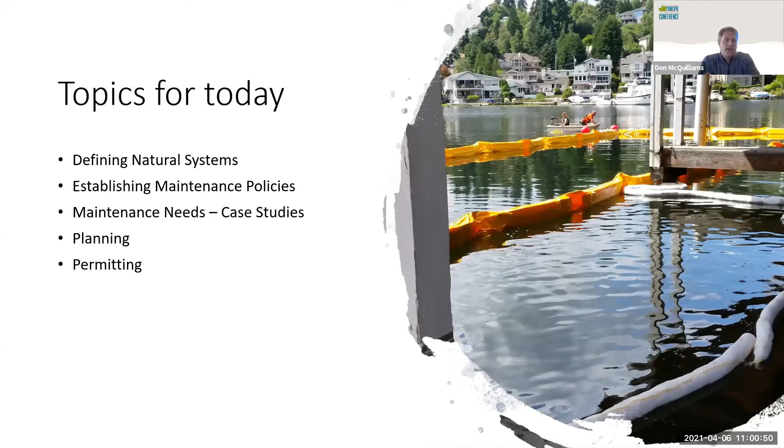So what I'm going to talk to you about today is defining our natural systems, establishing some maintenance policies and practices. I'm going to go through some case studies of why we do what we do, and then talk to you a little bit about how we do our planning and permitting related to natural systems.

So first off, let's make sure we're talking about the same thing. So we define natural systems for the purpose of this conversation as waters of the state. So these are streams, rivers, lakes, and tributary open channels. These are not ditches, pipes associated with your MS4. Those are under the restrictions of the NPDES permit, so they may or may not apply to what we're talking about today. So let's just keep this focused on the waters of the state.

You may also have some open spaces in your system where you own some property, forested land, wetland, etc., whether that be in your utility, your public works department, or just owned in general by the city.

So why am I talking about natural systems today? In Bellevue, we define our storm and surface water system, and we also refer to it as our drainage system, as the entire system within the city, both public and private, naturally existing and man-made, for the drainage, conveyance, detention, treatment, or storage of the storm and surface waters. So that right there pulls in my natural systems to be part of my storm and surface water system as I manage it across the city.

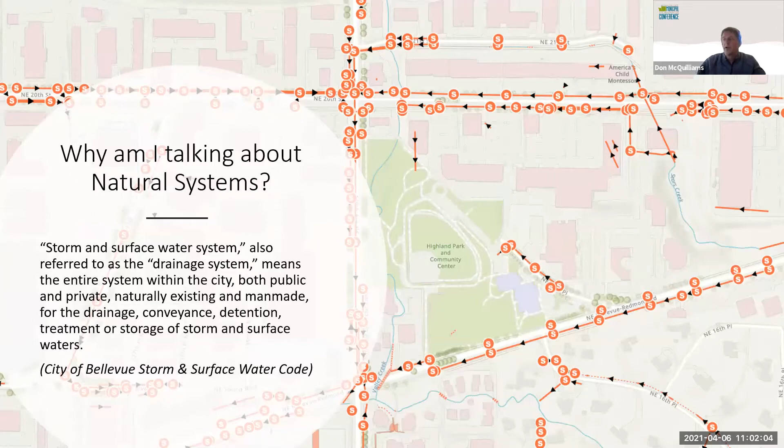To go on a little further, my storm and surface water system plan has a mission statement in it that says I have a surface water system that controls damage from storms, protects the surface water quality, supports fish and wildlife habitat, and protects the environment.

Why do I mention this to you? Because these two policies give me the authority to go work in natural systems. I don't have to go back and get that authority from my management, from my city managers. When I have an emergency, it's already written into my code, so it allows me to do that. So I want you to look at your organization's policies and mission statements, and do your policies and mission statements give you that authority up front? If not, you may want to think about going and talking to folks about establishing that inside of your policy.

Also look at your city comprehensive plan. I know in ours, there's a lot of ties to the environment, to natural systems, and how that works. And then are there any other policies that you need to consider as you look at your natural systems?

Okay, once you've established your policies and procedures a little bit, now you got to figure out who's going to do the work and when. So we have this very simple little grid that we give to all of our staff, so they have a good understanding of how and why we do work.

So you got to consider who owns the property. Do you have any easements or other agreements on those properties? What are the impacts threatening your public infrastructure that would have you go in and do some work in a natural system? And is it an emergency? Are there homes and businesses that are going to flood as a result?

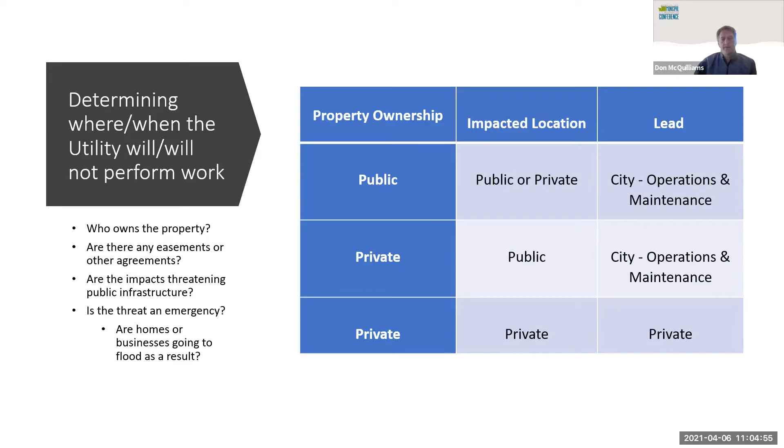Now, if it's a private to private matter where we have a beaver dam that's going to overtop a bank and flood an associated business, that is not something the City of Bellevue will step in and do work on unless it's an active emergency. Goes back to that on the left, very bottom: is somebody going to flood? And when I mean flooding, I mean water inside of the living areas, not nuisance flooding where it's in their parking lot.

Okay, let's look at a few types of maintenance and why we do maintenance on some of these open space or natural system areas. I'm going to talk to you about some case examples of brush clearing, sediment removal, beaver dam maintenance, flood protection, permit required maintenance, and emergency response.

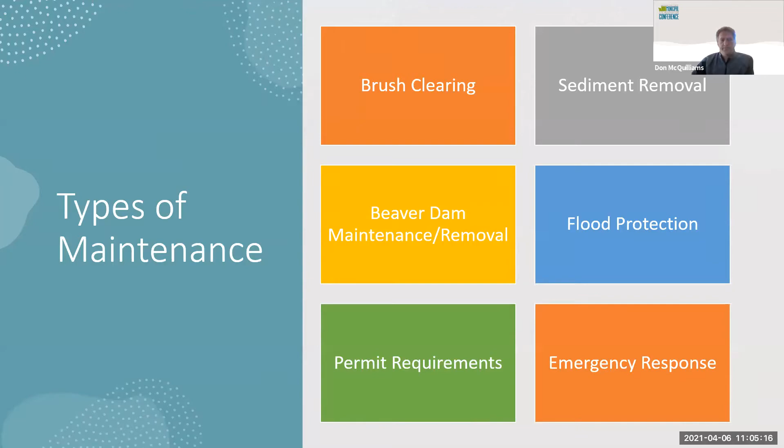So, brush clearing: in this example, in the 1980s, our engineering team had a wonderful idea to build a flood control water quality project just downstream of Phantom Lake and construct a new stream channel that would carry the water through the parkland there quicker and more efficiently than the previous wetland that used to exist. The two pictures you're seeing are actually that stream channel, and we go in every year and cut this brush out of the stream channel and haul it off site so that stream channel can function as designed. The design is down in the bottom right. Why do we do this? Because we've built this project, and as part of it, maintenance standards were set, and we've been doing those since the 80s. Utilities now owns this project going into the future.

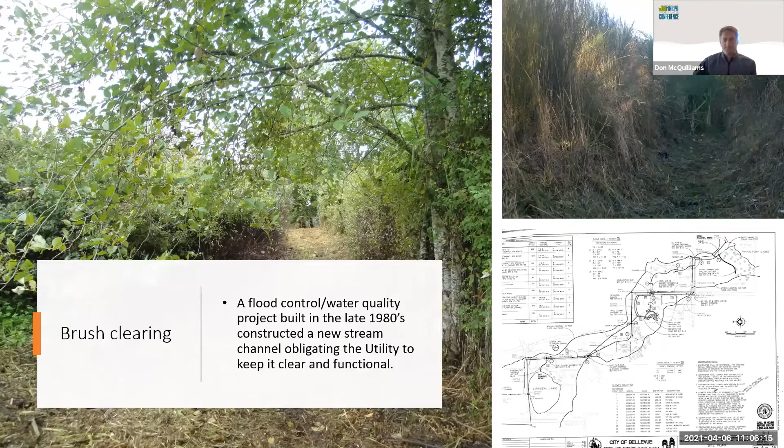Bellevue has about a half dozen what we call sediment removal ponds. These are in-stream or off-stream facilities specifically designed to capture sediment from the streams during storm events, drop that sediment out, and then we have a means to reroute those streams around so we can excavate that sediment. Why do we have these? Most of these are a result of land use practices, legal settlements, easement agreements. They all have some legal component to them. So what's involved in a project like this?

Well, they can get very big very fast. This picture you're seeing here, we call it Anna's Pond, and this one has a stream bypass that we have to put in place. We have to dewater the entire pond. Once the stream bypass is in place, we have to remove all of the fish without killing any of them, move them upstream or downstream, and account for all of them before we can even think about putting our excavators in there.

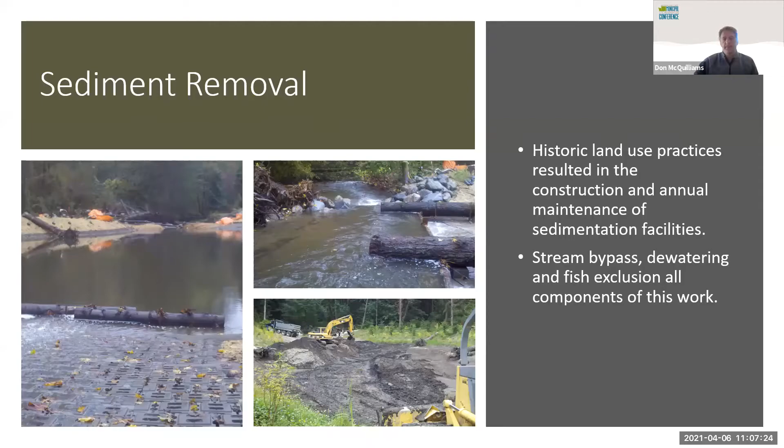All right, everybody's favorite: beaver dam maintenance. So it seems like over the last 10 years, I want to say around 2010, the beaver population really started to explode in the urban environment, and it's been going like crazy ever since. That picture in the upper left was one I ran into one day who was out sunbathing when I was out wandering around the site. I think he was just there to taunt me. That picture on the upper right, I'm going to talk to you about a little more on the next slide.

That's a picture of a dam that we do regular maintenance on. And then this tree picture down the bottom left that's cut—I showed up on a Friday, and that's about a 12 to 14 inch cottonwood. On Friday, there was no marks on that tree whatsoever. I came back Monday, and that tree had been completely cut down and was laying over the top of this dam because we did maintenance on it that Friday. Apparently the beaver did not like that, so he dropped it right on top of his dam.

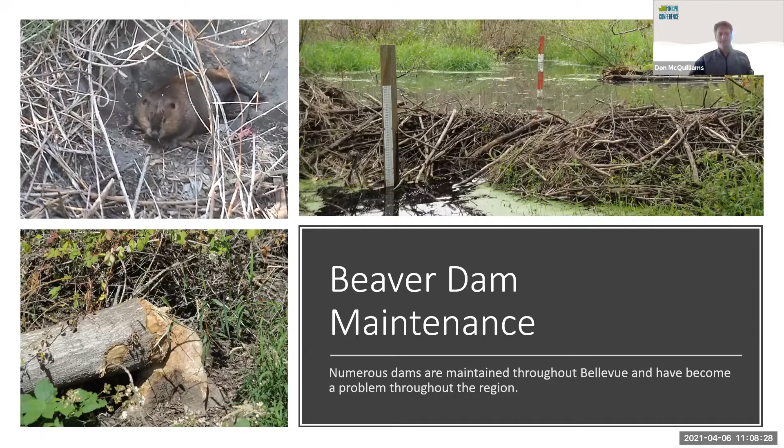So in that case, if that dam were to break, it's going to go inside that culvert and we're never going to be able to get it out. So this is a full removal case. This is where we go in, talk to our permit agencies, and coordinate to remove that entire dam in one sitting in 6-inch lifts.

This one, ironically, we removed the entire dam. They came back and built a new one inside the culvert, which we had to remove again. We also used trapping at that point to relocate many of the beavers to a different site. I'll talk to you a little more about trapping when we get farther along.

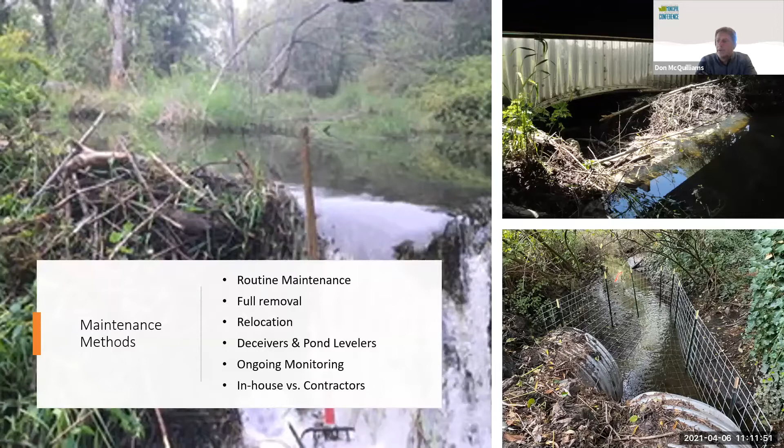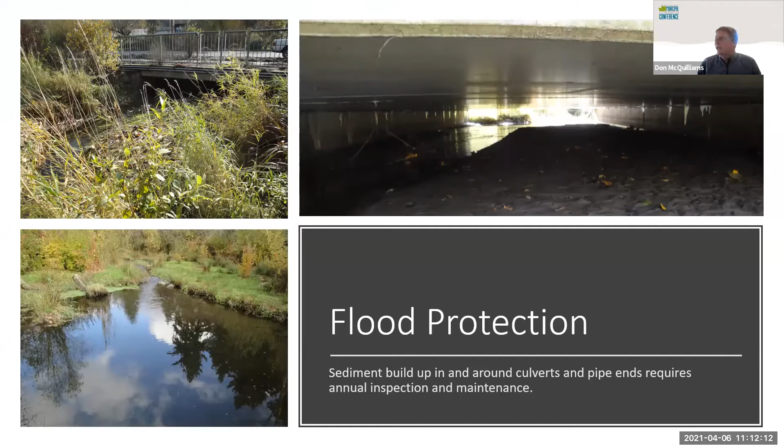All right, we also do flood protection in Bellevue. So this is a culvert underneath one of our roadways. It builds a lot of sediment up under that culvert. We can't let it build up all the way to the top, so we have to remove that. We go in here every few years, crawl on our hands and knees, and put a Vactor hose down there to remove that sediment.

Permit required maintenance. If you build a lot of in-stream engineering projects, they come with permit requirements. This one was a project to control sedimentation from getting into the gravel beds downstream that were built to help the salmon. So we had to come in on this one every couple of years and remove sediment from a sediment trap inside of this vault. As you can see, it's pretty labor intensive to get in there and get that done.

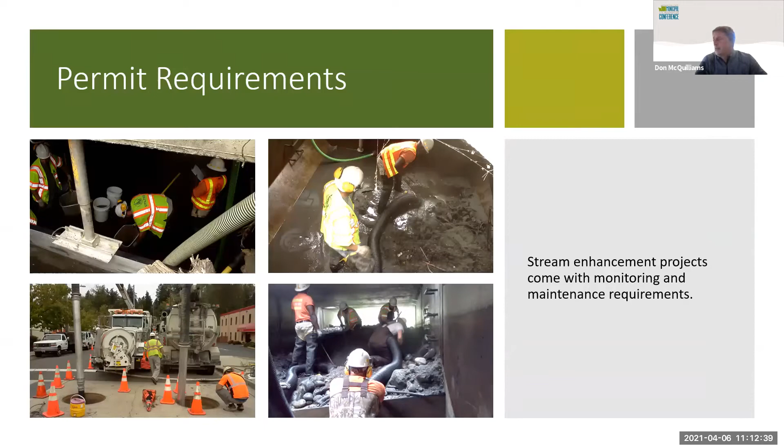Then there's emergencies. The 3 pictures on the left are a landslide that filled our detention pond. That bottom picture on the left, that's one of our guys in there. He created an air wand where he put a long piece of tubing on the end of an air compressed hose, pinched the end of it, and put a valve on it so he could shoot compressed air down into the sediment and the muck to try to find that outlet structure to free it up. Top right is a culvert that failed on us, got bent over, so we had to take an emergency HPA to go in and fix that.

And then the bottom right is a flooding problem. It's the same channel, both pictures, but that grass was clogging that channel to the point where we had upstream flooding and had to take an emergency action to go fix that.

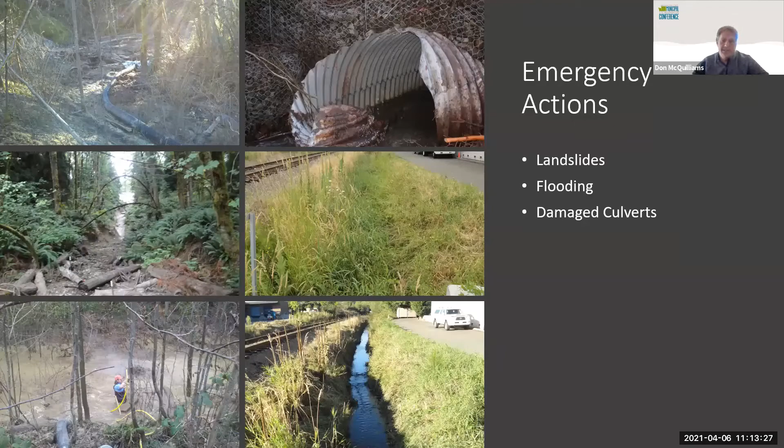Okay, so I just showed you some examples. That's what you might expect if you're working in the urban environment, if you're working in natural systems. So how do you do all this? Planning is your friend. Get it all written down up front. Take the time to write down all your sites around your city, what you do, why you do it, define the problem. This is going to be used to help you manage your system.

It's also going to be used to help you sell your management of your system to your permit agencies. What you want to include is where everything is, how you're going to inspect those, when an inspection triggers maintenance, how you're going to do your work methods when you do have maintenance—how you're going to remove sediment from that site, for instance. How you're going to sequence your construction, meaning how your trucks will come and go and how your excavator will move around these sites. Include any diagrams and designs that you have.

Some of these sites might be pre-constructed and the engineers may have already thought of this. For some of our larger sedimentation facilities, we have built-in bypasses. So the engineers did think about how to dewater those sites ahead of building them.

Think about what you're going to do with the sediment that you pull out of these sites. Do you need to test it? Is there contaminants in that sediment that needs to go somewhere else?

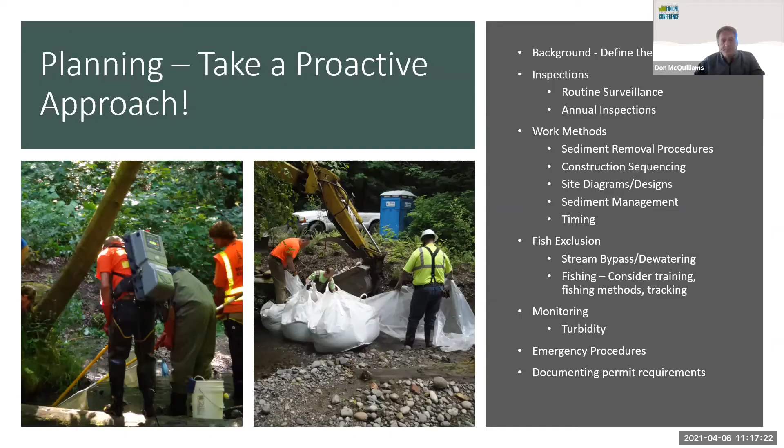So speaking of permitting for this work, why are you doing this permitting? The first thing you need to understand: you're doing it for the health of the streams, you're doing it because you're a good environmental steward, and you're doing it because it's the law.

There are a lot of permit types when you're working in streams and lakes. Your main one is this hydraulic project approval from the Fish and Wildlife Department. And that plan you put together in the last slide, you're going to use as your project plan to permit this work with Fish and Wildlife.

We're talking year-round project work here, not just project by project site. I like to try to permit multiple sites in one permit if I can. It's not always possible, but working with your agencies, often it is.

Other permits you may run into are clear and grade permits issued by your local municipality or county, land use permits—especially if you're working around sensitive or critical areas—shoreline permits if you're on the shores of lakes, or you may find yourself getting an Army Corps permit. I have one project in Meydenbauer Bay of Lake Washington that requires an Army Corps permit because it's within navigable waters.

I can't stress enough how much building relationships with your permit agencies helps. So if you don't know your permit agencies right now and you don't know who those people are, go look them up, go introduce yourself, go learn their names.

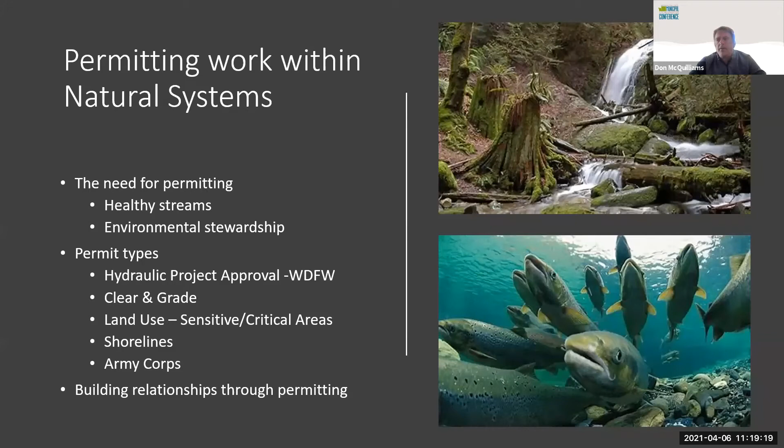I would be in trouble with my staff if I didn't mention aquatic invasives. In Bellevue, we have New Zealand mud snails - that's a picture of them on the bottom left over that coin. Horrible little things. The fish eat them, thinking they're filling up on food, but they're not. These little snails don't break down inside the fish, and the thought is eventually the fish will starve to death from eating them. They multiply like crazy, and they're very, very hard to get rid of once we have them in our streams.

That map on the right, that's a bunch of sites around town that we keep track of. When we find new snails, the red and purple mean it's a site we've identified that have mud snails. The orange and yellow are sites that potentially have them, but we haven't actually found them. The green is where we don't believe they are at this point.

But you need to talk to your staff about this. If you're going to be working in streams, this is important because we don't want to be moving invasives around - it's against the law. The best way to prevent that is just to stay out of the streams. So if you can minimize the amount of work you do in streams, great. If you can't, if you have to go in the streams, there's some other ways you can do it.

If you're only going in once in a while, the boots and gear you take into the streams, you can clean up real good, set off to the side, and let it dry for 2 weeks to a month, and then it's probably fine. If you're going in and out of streams more often, you need to decontaminate that gear.

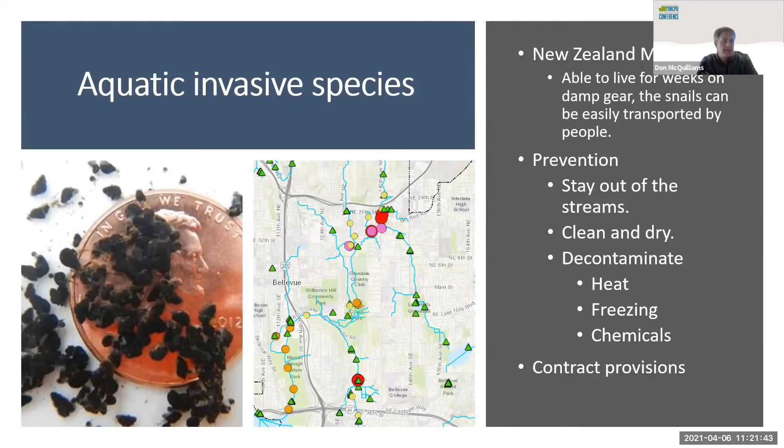And then in any contracts you have with contractors going out to work in your streams, please make sure you have provisions in there that speak about aquatic invasives and what they need to do to make sure they're decontaminating and following the appropriate procedures. And with that, I am happy to take some questions.

Thank you, Don. That was a very interesting presentation for sure. We do have some questions popping up, and I have some as well. Still getting my head around that - that was an outside-of-the-box presentation, so I appreciate you bringing that to the table.

The first question is: does Bellevue have a general HPA for regular maintenance, which allows for in-stream sediment removal at and near culverts and other structures, or does that work require individual project HPAs? Both. We have a general HPA for those known sites where we do work every year to every 5 years, and we identify that in the planning document. We have to pull individual HPAs for sites that pop up that are not on our radar, when something happens that's extraordinary, above and beyond what we have written in our general HPA plan. So it's a combination of both, and it's a lot of discussion with our local area biologist.

For the benefit of the rest of us, can you define what an HPA is? Sure. An HPA is a hydraulic project approval permit issued from Washington State Department of Fish and Wildlife. It allows you to do work below the ordinary high water mark in waterways.

Thank you. Our next question is, out of curiosity, where are some of the beaver dams located? This person was an intern for Bellevue Transportation for some time and has no idea where there are so many in the city. Oh, good lords. I think we're up to 40 plus sites right now that we monitor for beaver dams, whether they be active or not active. Our active sites, just off the top of my head right now, a couple of them are 108th Street, where it goes under where Northup Way is.